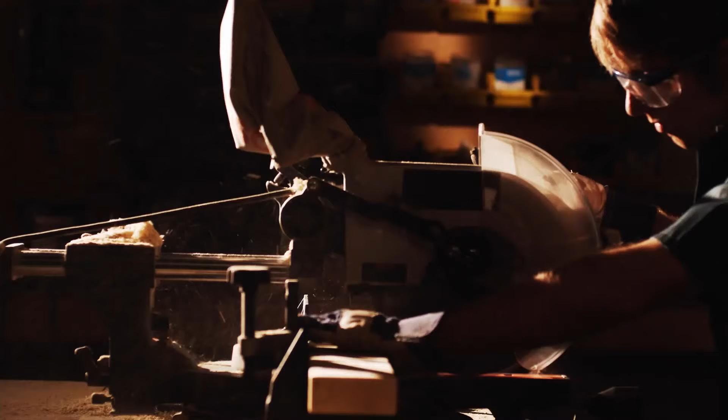I got into a VOTEC class in Moncks Corner, South Carolina, and the instructor saw some ability in me, so he took me to some competitions, which we won, district and state, and I really enjoyed the field, so I pretty much stayed with it throughout my life.

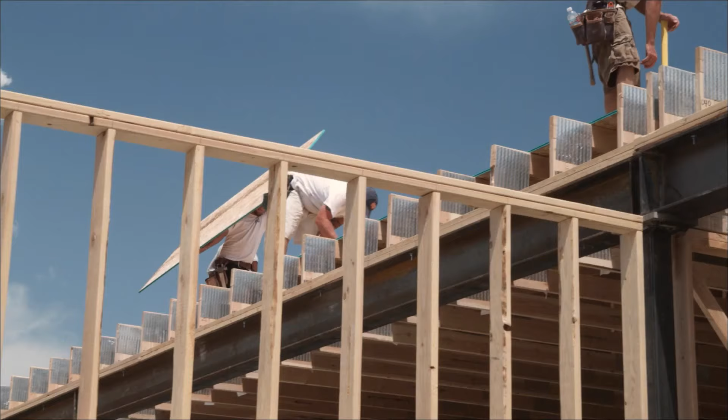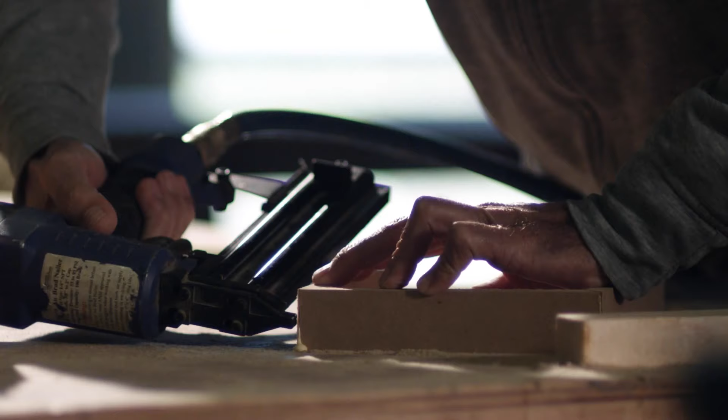So I went to work for Gaithersburg Cabinetry. I've been there for over 20 years. When I started with Gaithersburg, it was fairly small, a handful of employees, 10, 12 maybe. So everyone would measure, build, finish, sand, deliver, and install. As the company got bigger, we all got isolated and got specific fields.

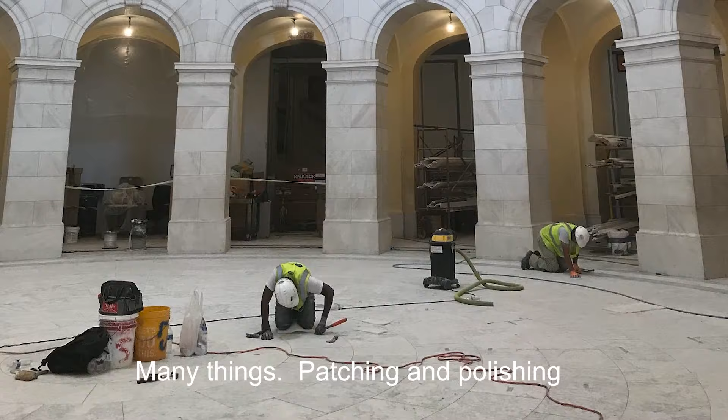I think the most fulfilling part of my job is to take someone's idea and turn it into something that's real, something that they're proud of because it was their idea to begin with. So basically turning their idea into a product that they can use or show or be proud of.

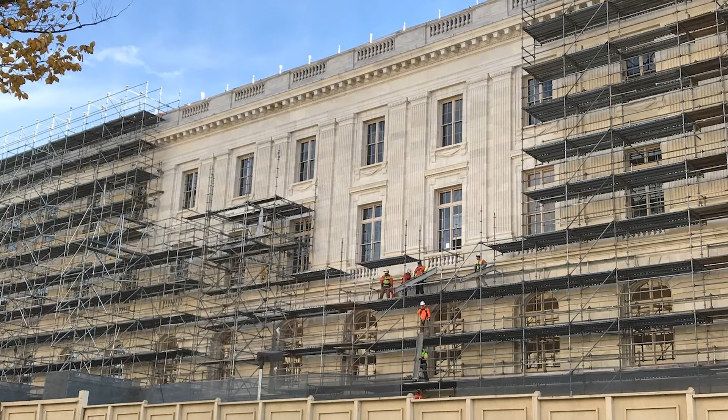My favorite is the Martin Luther King Memorial, White House, Capitol, Pentagon, Washington Monument. Many jobs, it's a lot of work.

One of my most fascinating jobs was the Jefferson Hotel because it had such a short deadline and it was very intricate. To put out that quality of work in a short time and be successful was a challenge and fun. The Jefferson Hotel actually won a Star Award, which made it even more worthwhile, being recognized by the Washington Building Congress. That's probably one of the other reasons it was so intriguing and fun for me.

My name is Carolina Lopez, and my dad's being inducted this year, Jose Lopez. He's very dedicated to his work. Even on the weekends he'll still be getting ready. Sunday he'll start getting ready for work early for Monday.

He really enjoys it, and he's always talking about it with his friends, with his family. We all know all the projects that he's going through. A couple weekends ago they finished the World War II Memorial, and he took me, we went walking, and he showed me all the things that we're doing and the stuff that he needs to go back to finish.

Whenever I have someone in training or who's working with me that's younger or just learning the trade, I always try and tell them how rewarding this line of work is and what you can get out of it. You get out of it like anything that you put into it.

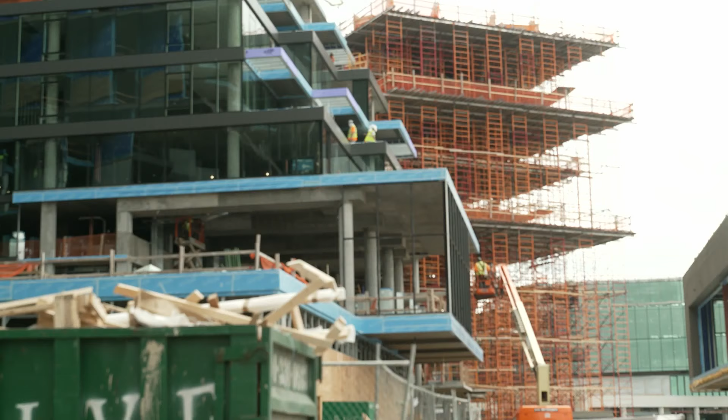My name is Jason Ryan. I'm a project executive with Baker DC here on the Wharf project. This is obviously a big job in town, unique job in town, high profile. If you're not that familiar with it, we're bound by the Washington Channel, and we're also bound by the Green Line. Some of the unique work was working with the requirements of WMATA and the support of excavation to keep the tunnels from falling into the site.

So there was some very significant support of excavation and vibration requirements for the metro tunnel itself, to the point where we had to pour the foundation walls that would hold the metro tunnel back after the basement was complete. So we had to go back underneath and pour those walls afterwards, just because of the requirements, the support of excavation, and all the sophistication that went into that. So that's something unique you don't see every day.

As well as the sequence of how we poured the mats and everything like that. Because of the tunnels there, they didn't want the tunnels floating. So there was a certain amount that they could excavate, and then we would have to pour with the vibration isolation on top of that. So there was lots of sequences with multiple trades there to get us to the point where we had to get it completed.

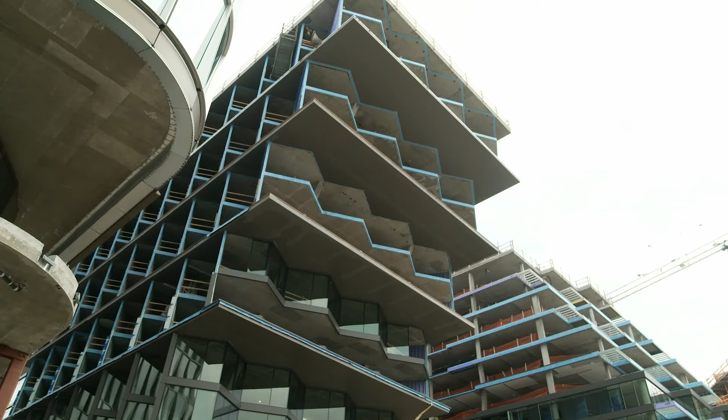This building here, this is what they call Parcel 8, and it's got 2 wings. The southern wing steps back while the northern wing is cantilevered out. So the whole thing is opposite. One steps in, one steps back.

The river over here, we got the metro over here. The slabs in the middle is what kept those from doing this. So we had to get those slabs in to allow them to pull all the steel, the rakers, and everything else. So these are some of the pieces, as you can kind of see with the pallets that are left over.

So all the testing they did for vibration, they used that to determine what density needed to go under that footing or that mat. If you're looking at the mat, it looked like a tie-dye shirt. You had the green, and all of a sudden it turned into red, and then it had a couple small areas of purple, because that was the highest density of vibration there. So it just turned into layout.

As well as installing, so to make sure it was in the right spots. And we had to interpolate where that occurred so that we put them in the right place, because if you put something that's not dense enough where you're getting a lot of loads, you're going to get building deflection. So it was very critical that we got the right density of material in the right places.

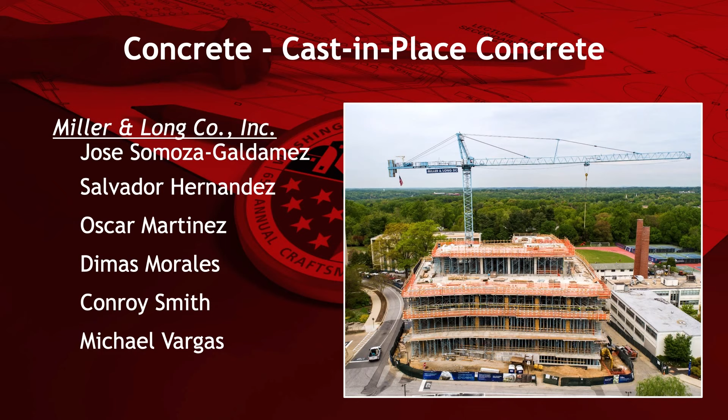In the category of concrete, cast-in-place concrete: Jose Somoza-Galdamez, Salvador Hernandez, Oscar Martinez, Dimas Morales, Conroy Smith, Michael Vargas, with Miller & Long Co., Inc. Project American University Hall of Science.

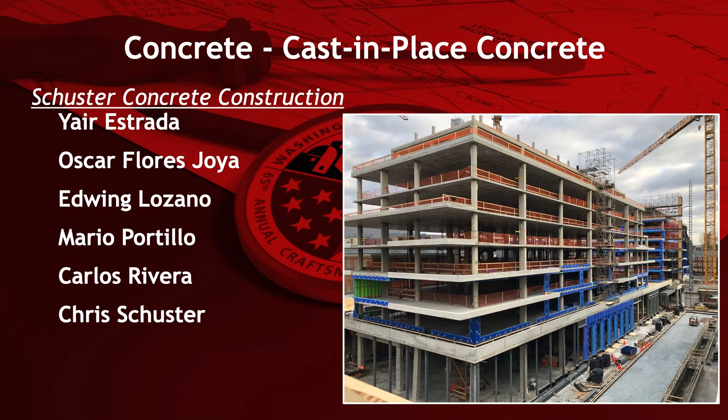In the category of concrete, cast-in-place concrete: Yair Estrada, Oscar Flores Joya, Edwing Lozano, Mario Portillo, Carlos Rivera, Chris Schuster, with Schuster Concrete Construction. Project City Ridge.

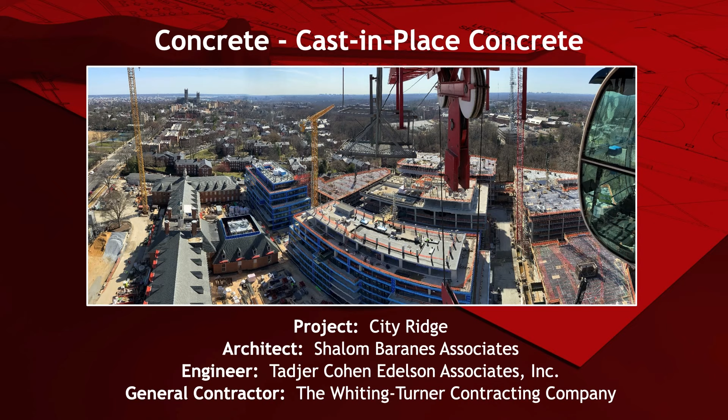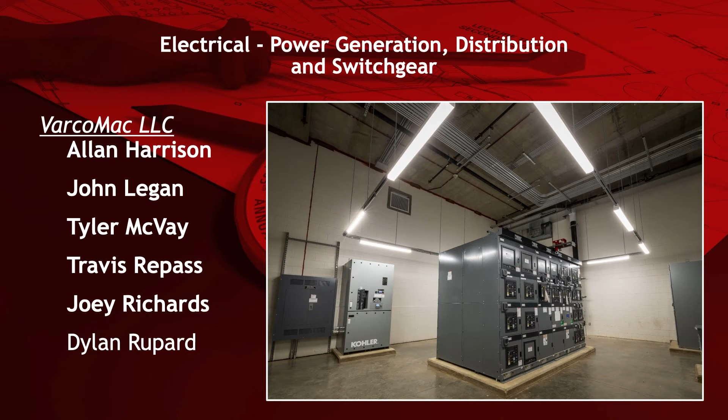In the category of Electrical, Power Generation, Distribution, and Switchgear: Allan Harrison, John Legan, Tyler McVay, Travis Repass, Joey Richards, Dylan Rupard, with VarcoMac LLC. Project MedStar Southern Maryland Hospital Center ED Expansion Phase 2.

In the category of Electrical, Power Generation, Distribution, and Switchgear: Dylan Calloway, Matt Eade, Temple Hypes, Dave Kaplan, with VarcoMac LLC. Project IFMC OR Renovations.

In the category of Electrical, Power Generation, Distribution, and Switchgear: Christina Dandy, Chris Grimes, Mike Gunzelman, Greg Naurot, Al Swan, with Synergy Electric Company, Inc. Project Architect of the Capitol, Rayburn Building Emergency Power.

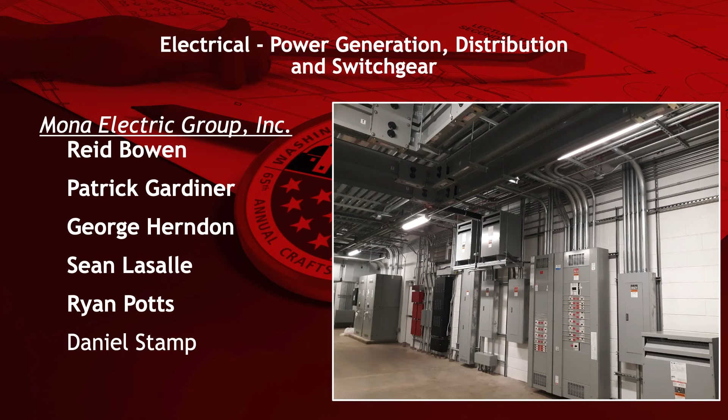In the category of Electrical, Power Generation, Distribution, and Switchgear: Reid Bowen, Patrick Gardiner, George Herndon, Sean Lasalle, Ryan Potts, Daniel Stamp, with Mona Electric Group, Inc. Project Capital One Block C Podium.

In the category of Electrical, Power Generation, Distribution, and Switchgear: Channing Crawford, Robert Crawford IV, Stephen Cross, Gary Downing, Danny Fallon, Tim Pierce Jr., with Power Solutions LLC. Project QTS Project Acadia PH2A.

In the category of Electrical, Power Generation, Distribution, and Switchgear: Mitch Andrews, Robert Hazychak, John E. Jenkins III, Paul Page, Jeremy Rodkey, Robert Walker, with Power Solutions LLC. Project Raging Wire NTT VA5.

In the category of Electrical, Power Generation, Distribution, and Switchgear: Matt Grady, Jason Mervin, Jeff Pollack, Jakin Skewkus, Thomas St. John, Solomon Thomas, with Mona Electric Group, Inc. Project: NIST Building 245 Modernization.

In the category of Electrical, Power Generation, Distribution, and Switchgear: Randy Beasley, Tim Dulaney, James Lawrence, Adrian Smith, Charlie Sutton, with Singleton Electric Company, Inc. Project: Government Publishing Office, New Electrical Substation.

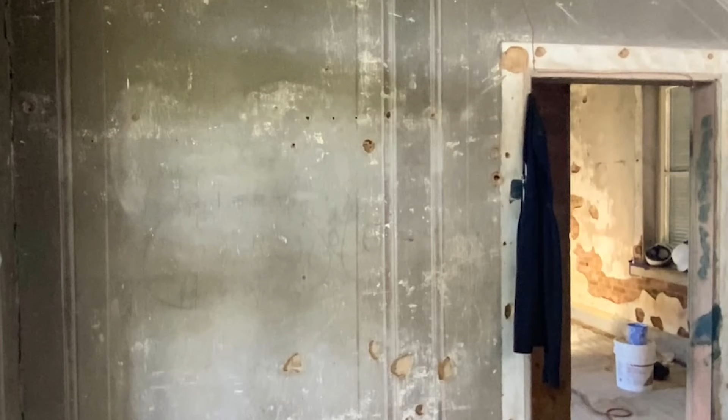The Monocacy battle really changed the outcome of the Civil War, which is why there's such historic prevalence. It is really held near and dear to the National Park Service. These buildings have been left open to the environment, no air conditioning, no heat, and have had a lot of water damage over the years. They were losing lath, they were losing plaster, they were losing everything.

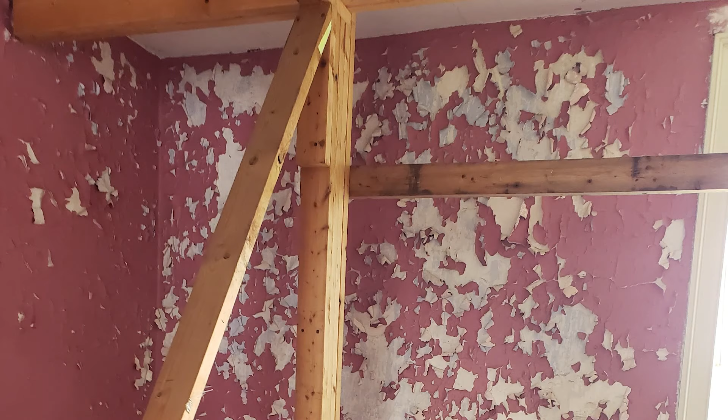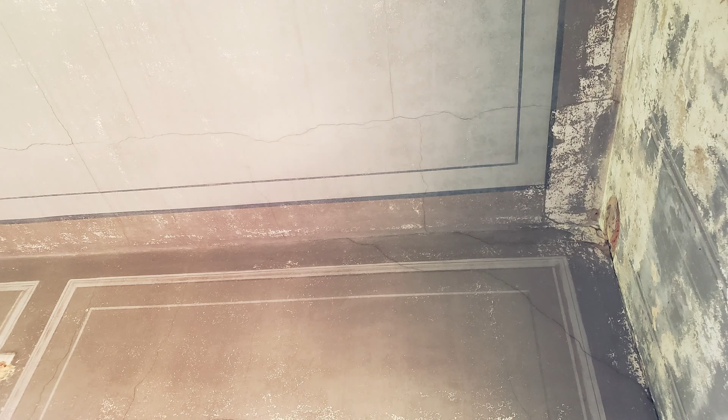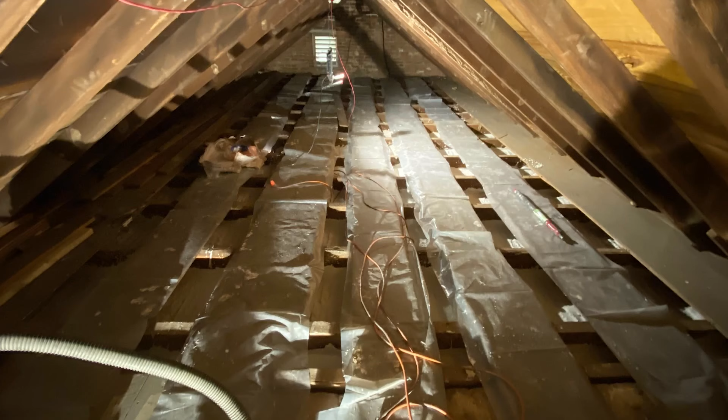This was strictly a stabilization of the plaster, not really a restoration project. They wanted to start saving the plaster because, in most cases, it was literally delaminated from the wood lath about 90%. When you're told to preserve this plaster, save every square inch that you can, there's no room for error. So my project approach was to build structures to push the plaster back up against the wood lath, go up in the attic, remove the floorboards, save the square nails, and label and number every plank. Each one of these structures was custom in each room.

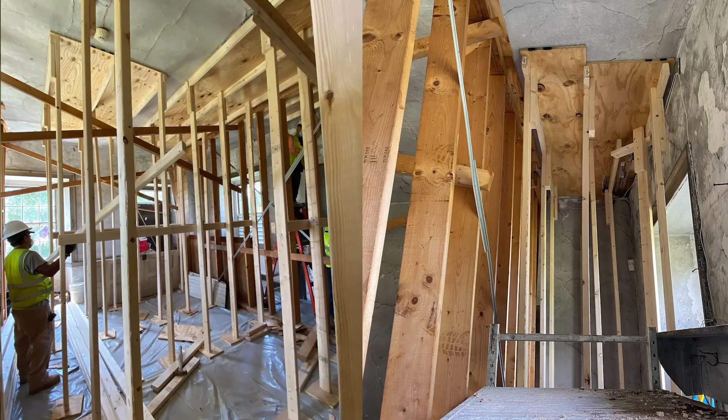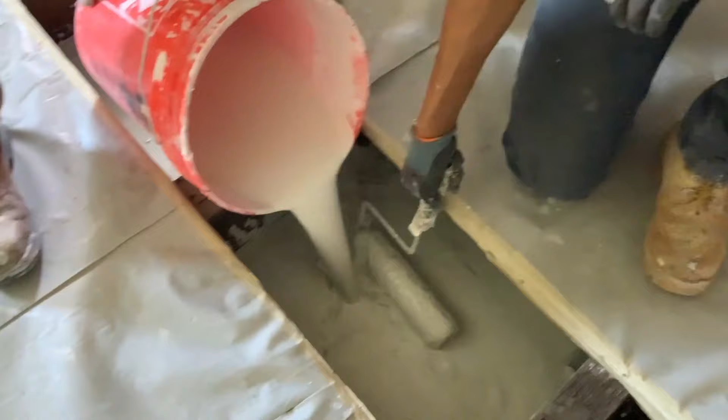You can see the extent of how much plaster we had to pour. But what this process did was completely reattach the ceiling plaster, encapsulate the wood lath, and rekey it back up. These ceilings are so tight now, they'll never fall again.

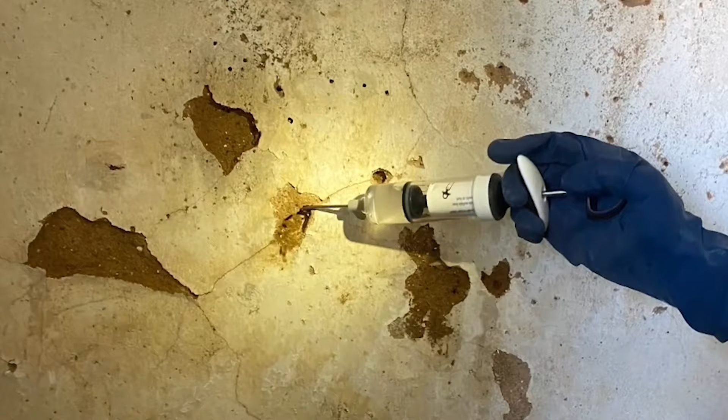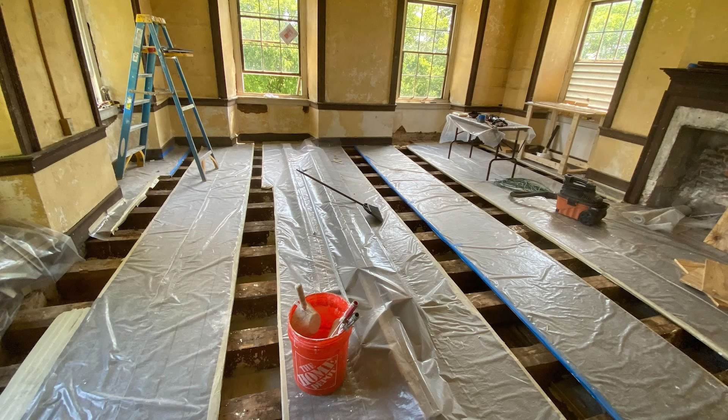Every single crack and crevice in all three of these buildings received multiple injections of consolidant. I can't even begin to tell you how many injections we did, thousands and thousands. In some areas where the wood lath was no longer reaching from one side to the other, we provided blocking in there. Again, not because this is what we had to do.

This was our suggestion to save as much of the historic fabric of these buildings as possible. Part of our defined scope of work was that if there were pieces of plaster laying on the floor, we needed to identify them, put them back together, and put them back where they went. There was a wood grain in the plaster, and we would lay these out on tables and match up the wood grain. So it was kind of a big puzzle. Then I glued them all back together with plaster weld in bigger chunks, and we started reattaching them.

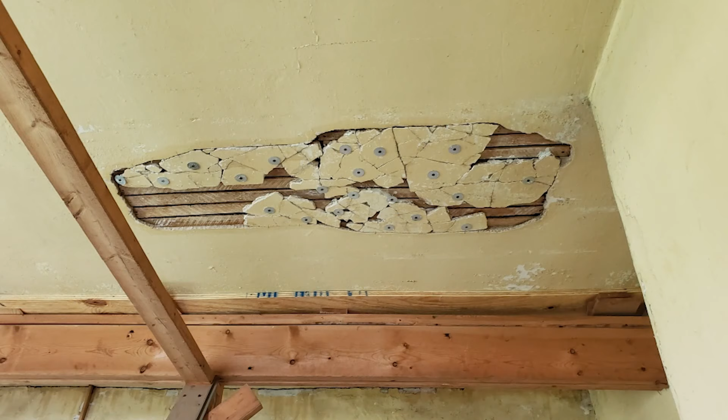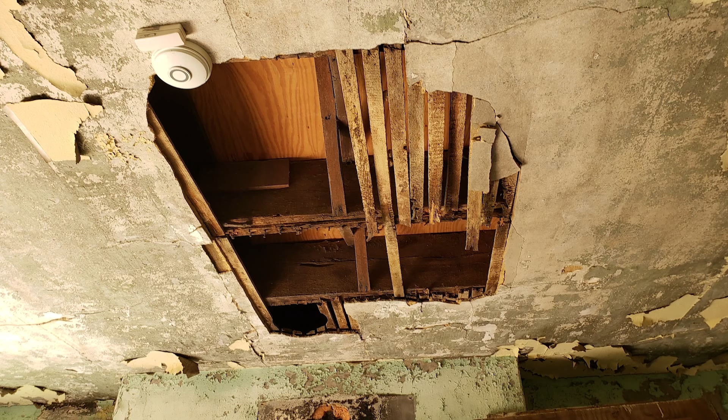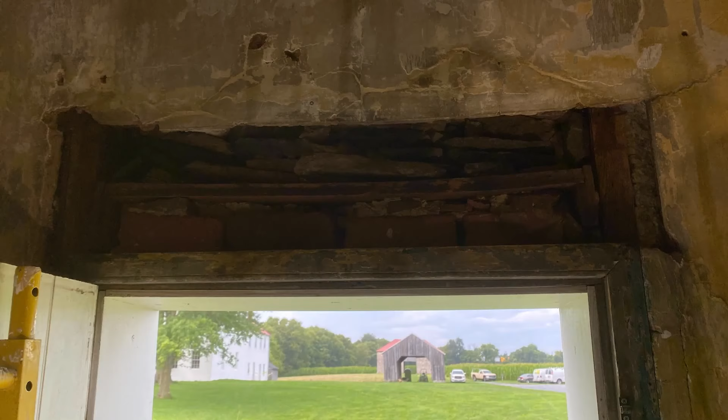Back to the ceiling, all of our plaster mixes were matched to what the existing plaster was - we used the same material, the same type of sand, the same type of plaster mix, the same type of lime added. We mixed everything right there in the field. So this wasn't just a plaster job. This was a true labor of love for us to go in and do what we did. But yeah, it was just an enormous amount of work and craftsmanship to be able to preserve as much of the plaster as we could that was originally there.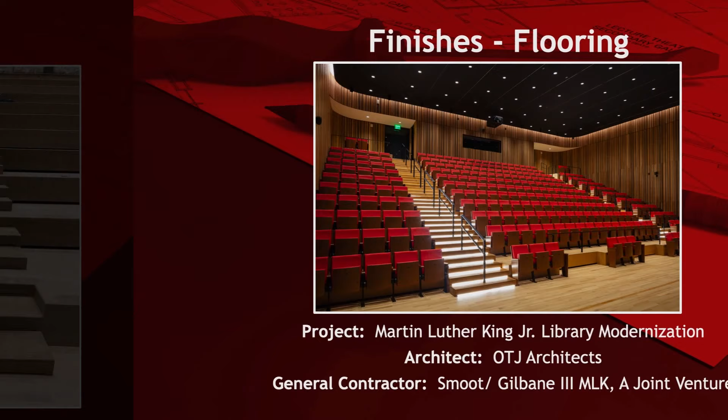In the category of Finishes, Flooring: Patrick Joy, Vassal Kikalo, Russell Sterner, with Mastercare Flooring. Project Martin Luther King Jr. Library Modernization.

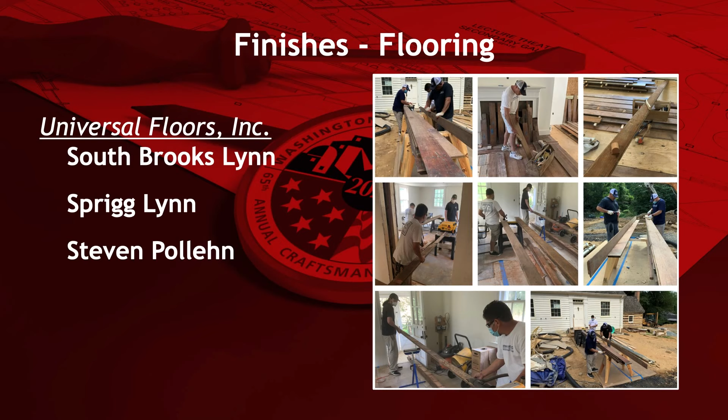In the category of Finishes, Flooring: South Brooks Lynn, Sprigg Lynn, Steven Pollehn, with Universal Floors, Inc. Project Josiah Henson Museum Historic Restoration.

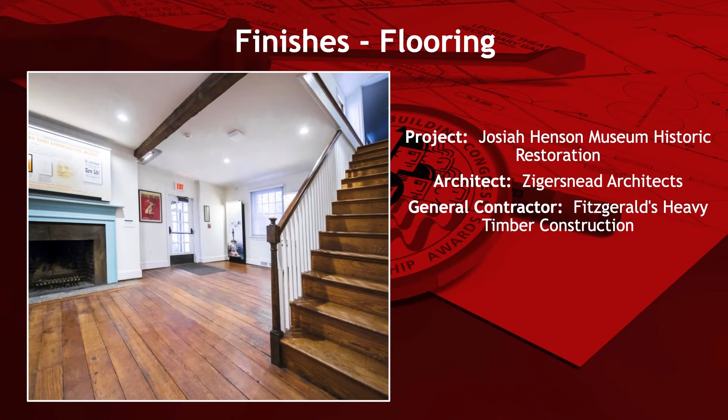In the category of Finishes, Painting and Wall Covering: Graham Armstrong, Felix Cespedes, Matt Lawler, with Sparkle Painting Company. Project Crossing.

In the category of Finishes, Plaster: Nelson Rodrigo Berrios, Cirilo Tapia Fuentes, Maximiliano Soto Ledesma, Pablo Condori Perlas, Melitón Soto Quirós, Elmer Ferrufino Zurita, with ATS Studios, LLC. Project Martin Luther King Jr. Library Modernization.

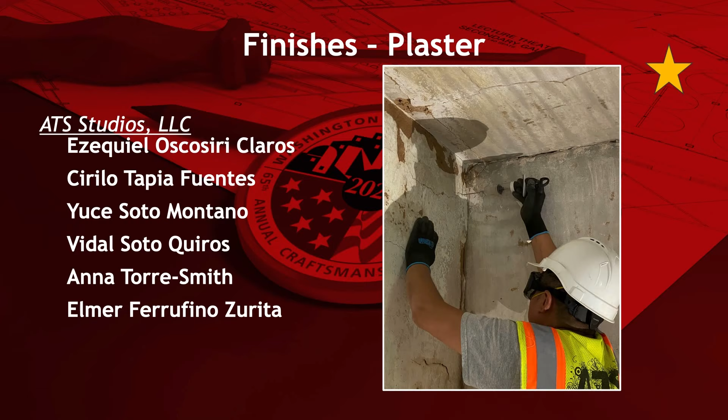In the category of Finishes, Plaster: Ezequiel Oscosiri Claros, Cirilo Tapia Fuentes, Yuce Soto Montano, Vidal Soto Quiros, Anna Torre-Smith, Elmer Ferrufino Zurita, with ATS Studios, LLC. Project National Park Service Stabilization and Restoration of Monocacy Battlefield Historic Plaster.

In the category of Finishes, Plaster: Julian Davis, Jose Gomez, Ian Jenkins, Wills Mayo, Marlon Salmeron, Ricardo Santos, with Hayles & Howe, Inc. Project Elliott Hine Middle School Renovation.

In the category of Masonry, Exterior Stone: Gilmer Alman, Maber Hernandez, William Orellana, Alfredo Ornelas, Tommy Palovich, with R. Bratti Associates. Project Capital One Block C Performing Arts Center.

In the category of Masonry, Exterior Stone: Jose Ramon Casal Campos, Antonio Chirino, Ernesto Machado, Mauro Narciso, Leonardo Bravo Reyes, Freddy Rios, with Lorton Stone LLC. Project National Native American Veterans Memorial.

In the category of Masonry, Exterior Stone: Cándido Abundes, William Ángel Arevalo, Manuel Omar Hernández, Mauro Narciso, Iván López Cieiro, Antonio Jorge Díaz Silva, with Lorton Stone LLC. Project Arlington Memorial Bridge Disassembly, Protection, Preservation, and Restoration.

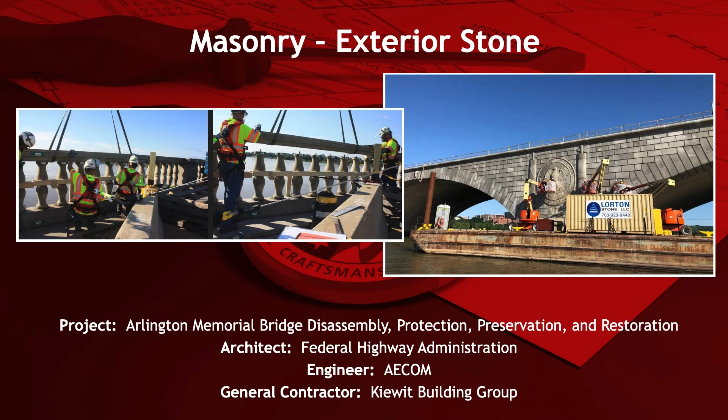In the category of Masonry, Exterior Stone: Sterling Gaston, Eric Holdway, Carlos Mariño, Juan Romero, Agustín Baca, Hugo Baca, with Lorton Stone LLC. Project Corpus Christi Catholic Church.

In the category of Masonry, Interior Stone and Marble: Reynaldo Andrade, Ludwig Portillo, Crispin Urquizu, Denise Bilka, with R. Bratti Associates. Project The Wilson and the Elm.

In the category of Masonry, Interior Stone and Marble: Eric Blanco, Carlos Blanco Romero, David Kirby, Francisco J. Mijango, Ronald Wondolowski, with Boatman and Magnani. Project: Paul Hastings, D.C.

Also in the category of Masonry, Interior Stone and Marble: Carlos Blanco Romero, David Fitchett, David Kirby, Ronald Wondolowski, with Boatman and Magnani. Project: 250 M Street, DDOT Headquarters. And: Jose Garay, Victor Hernandez, Felipe Madureira, Ruben Moya, Zenon Moya, Wilver Zavala, with Rugo Stone LLC. Project: Metropolitan Square Atrium Renovation.

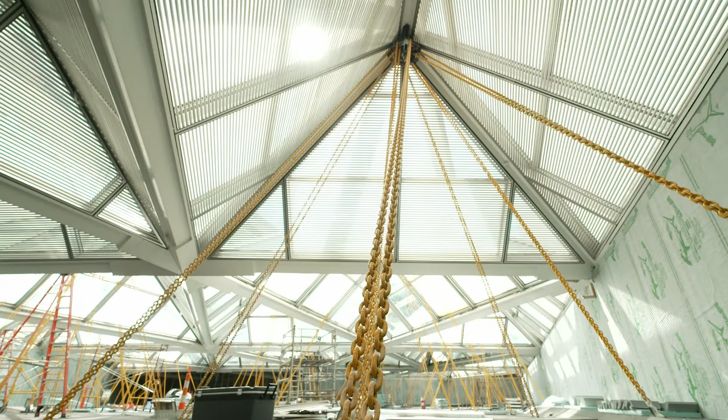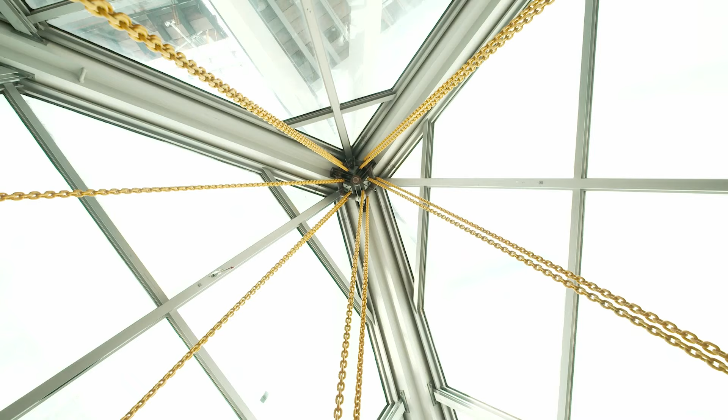For context, we're standing in the main atrium of the East Building of the National Gallery of Art. Our project includes the replacement of the 16,000 square foot skylight right above us. The skylight consists of 25 tetrahedrons, all laid out in one single isosceles triangle, and that triangle geometry is mimicked throughout the East Building as a design theme.

The replacement of the skylight was to be done in such a way that would allow the gallery to remain fully operational while adhering to strict security measures, environmental control measures, noise and vibration limits, temporary waterproofing measures, and above all making sure the irreplaceable works of art in the atrium remain protected. So BrandSafway designed a scaffold and rigging system to meet all of these requirements.

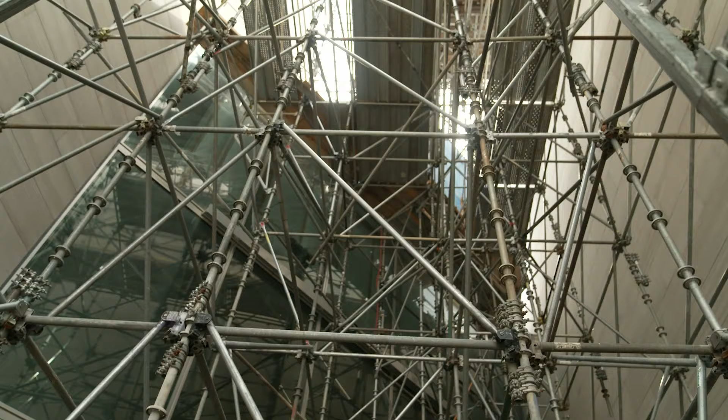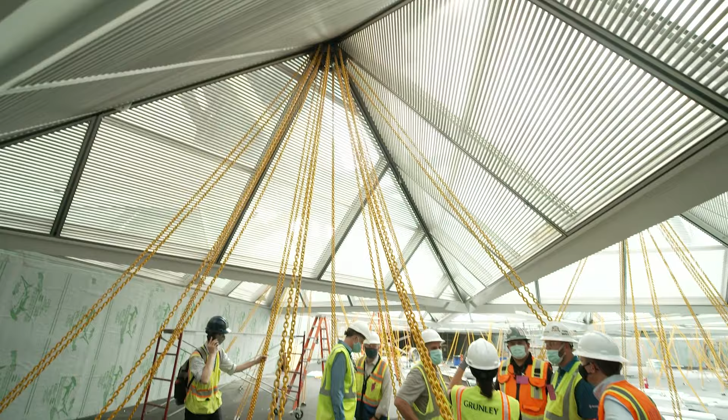A temporary scaffold tower was built, and BrandSafway transported material to the top of the scaffold, starting to build out the initial 250 square foot platform section from the top. They also custom fabricated 25 brackets mounted to the apex of every single tetrahedron, and these brackets hold the chains that support the platform.

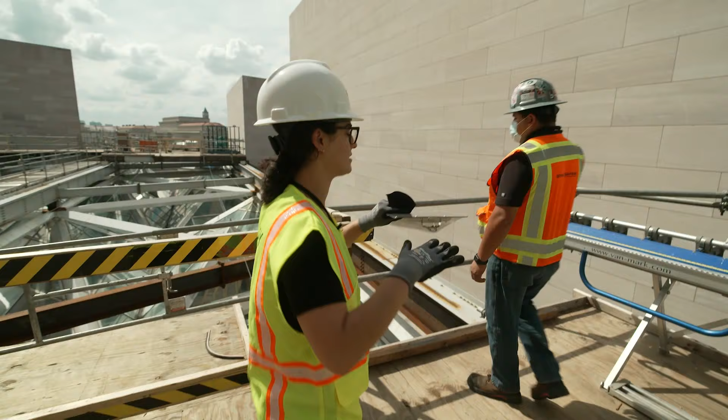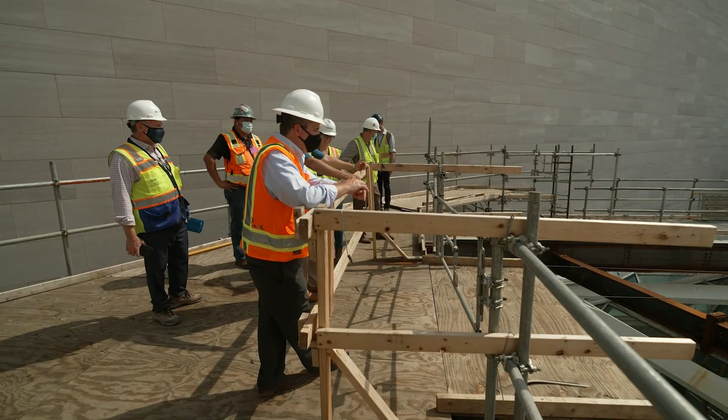The replacement of the skylight includes every component of the system with the exception of the steel framing. So this system we're standing on top of is the last piece of the puzzle of BrandSafway's scaffolding and rigging system. It came with first protecting the sculptures, then building the suspended platform, and lastly assembling the gantry system above.

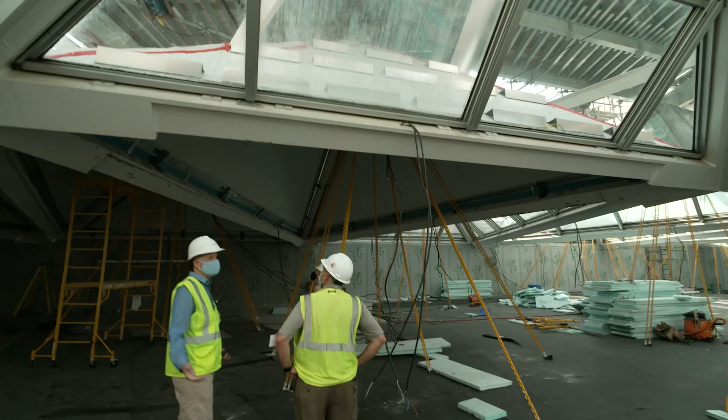Very, very cool. It truly is. I feel so lucky, and it's been a huge challenge for me. It's been a huge learning curve, and I would not have it any other way. It's awesome.

This is the Corpus Christi Catholic Church project out in Aldie, Virginia. It seats about 1,200 people, and today we're going to be looking at the roof specifically. Something significant about the roof is there's a lot of area—it's an 18:12 slope, so it was a really physically daunting task.

It was done by rough roofers who had a large crew every day. They had pick boards, a lot of lifts, boom lifts, and mountain climbing gear that they used every day. They took special care to put their tie-off points along the ridge so that any lines wouldn't overextend, keeping everybody safe during this project.

The most significant part, my favorite part of the church, is the steeple. It's called a flèche, the French word for steeple. There are really four tiers to it, and everything is made out of 20-ounce Freedom Gray.

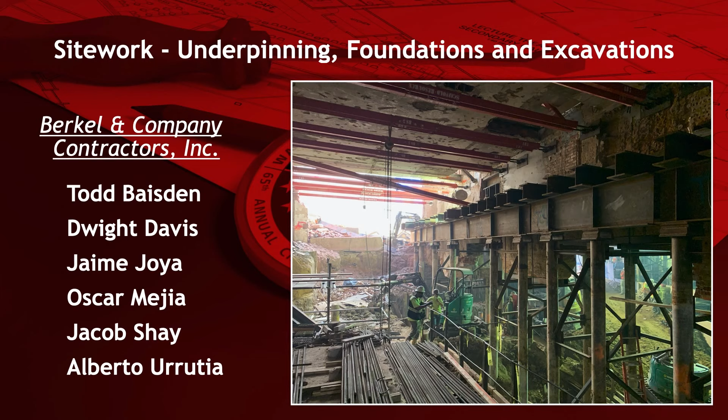In the category of Sitework, Underpinning, Foundations, and Excavations: Todd Baisden, Dwight Davis, Jaime Joya, Oscar Mejia, Jacob Shay, Alberto Urrutia, with Berkel & Company Contractors, Inc. Project, Milken Institute Center for Advancing the American Dream, Phase 2.

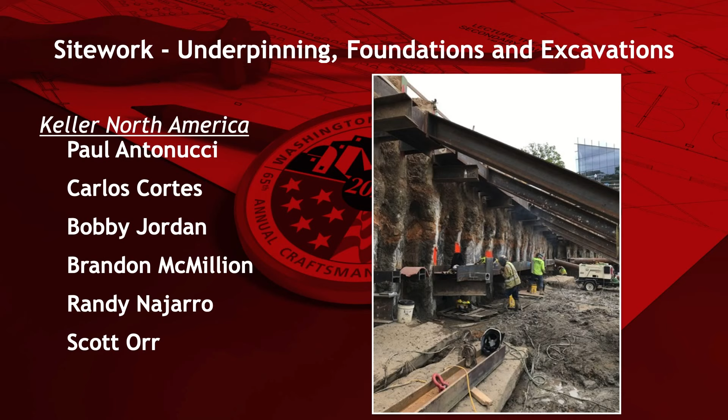In the category of Sitework, Underpinning, Foundations, and Excavations: Paul Antonucci, Carlos Cortes, Bobby Jordan, Brandon McMillion, Randy Najarro, Scott Orr, with Keller North America. Project, The Wharf, Phase 2, Horizontal.

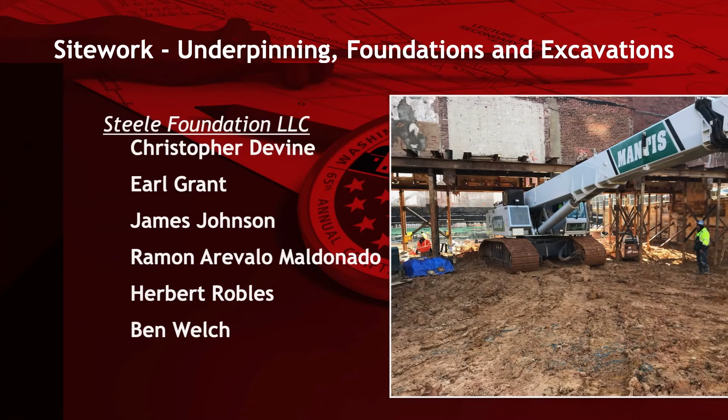In the category of Sitework, Underpinning, Foundations, and Excavations: Christopher Devine, Earl Grant, James Johnson, Ramon Arevalo Maldonado, Herbert Robles, Ben Welch, with Steele Foundation, LLC. Project, Collection 14.

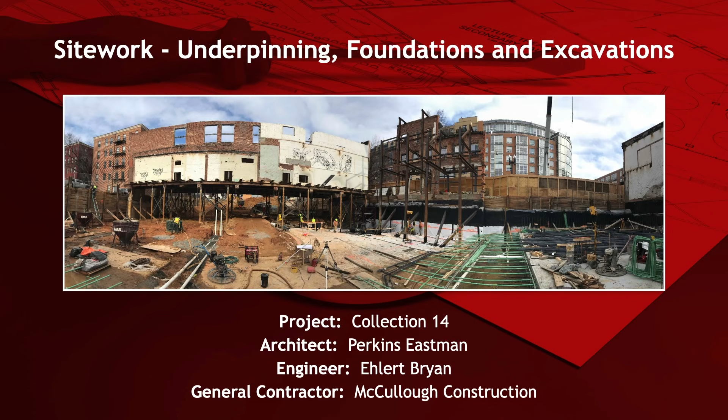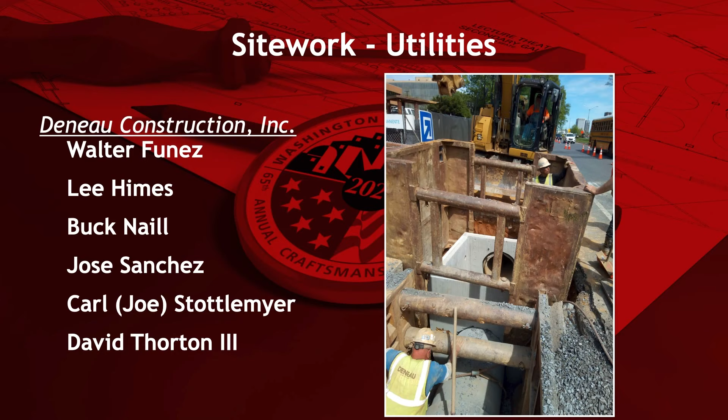In the category of Sitework, Utilities: Walter Funez, Lee Himes, Buck Naill, Jose Sanchez, Carl Joe Stottlemyer, David Thorton III, with Deneau Construction, Inc. Project, KP Rockville Regional Lab.

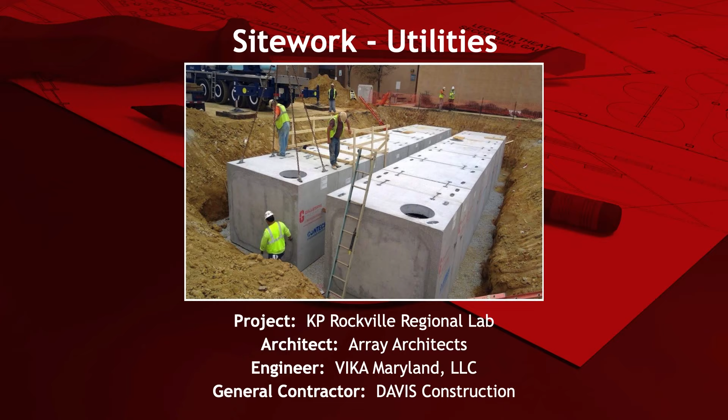Let's take a moment to view the final video segment showcasing this year's Star Award nominees in the categories of Finishes, Drywall, Morgan State University's new Student Services Center, and Special Construction, Steel, Structural Steel, Reston Gateway.

Marshall was contracted to furnish and install structural and non-structural metal stud framing, acoustical and thermal insulation, gypsum wallboard, fire stopping, acoustical and specialty ceilings, as well as rough carpentry.

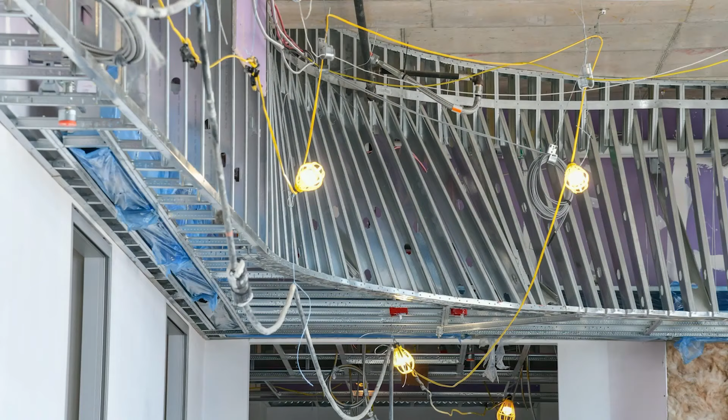This architectural masterpiece is the latest addition to Morgan State University's 152-year-old campus. Tyler Hall consists of a 5-story, 139,000 square foot structure. The structure also incorporates architectural elements like stone, metal panels, and glazing to maximize natural light and achieve a visually stunning appearance. This project was designed and achieved LEED Silver certification.

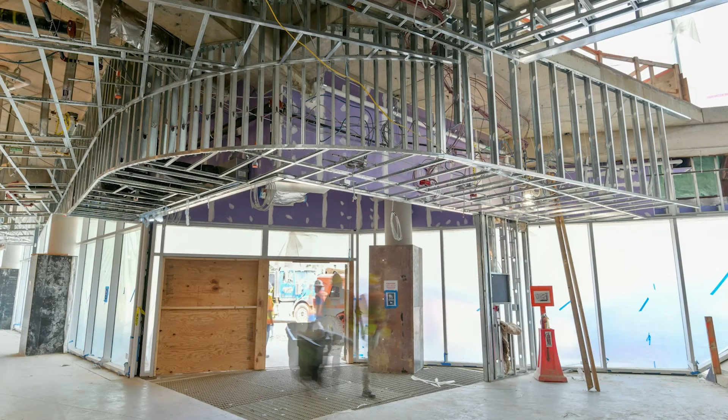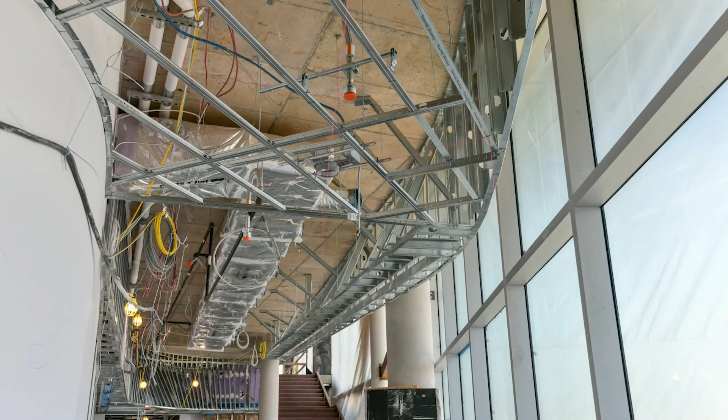Our portion of the project took just under 2 years to complete. Going into this project, we knew it would be difficult, but we truly didn't comprehend the complexity of its design intent based off the two-dimensional drawings we were provided, and how this would all play out with an aggressive schedule. We had to assemble the best team possible to tackle the challenges this project was going to present.

Our first challenge was layout, so we had to request a carte blanche approach to design of our framing. We utilized mathematical equations when possible, our total station robotic layout tool, a ton of man hours, and our talented team coordinating our framing members to ensure we achieved the obscure angles, complex radiuses, and ever-changing pitches that the architect was attempting to represent on the drawings.

Our next challenges were gypsum wallboard and finishing installations.

With the help of some of the best hangers, finishers, and finish carpenters in the industry, we were able to provide what most would have thought was nearly impossible. The amount of time, precision, and commitment that went into the execution of this work embodies everything you could expect from a true master craftsperson.

Commercial Interiors and the entire project team are so proud of the way this project turned out, and we hope that everyone who has the opportunity to visit this building enjoys what they see.

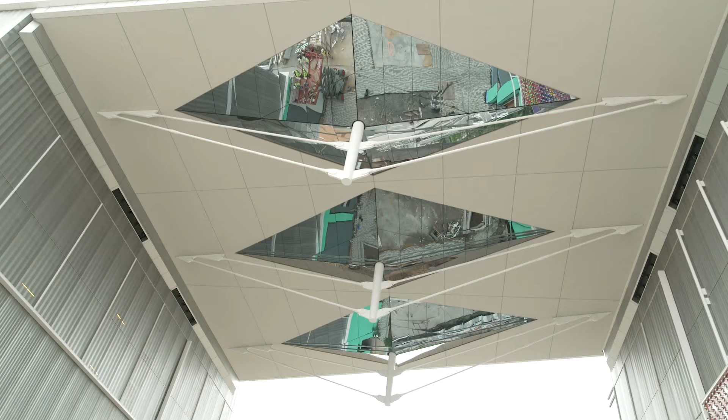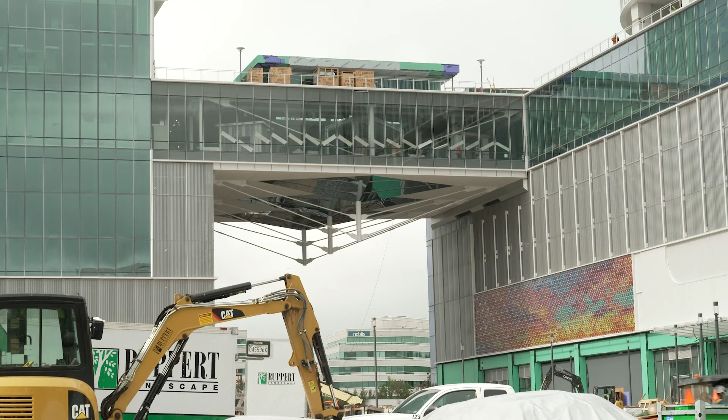Hi, my name's Mike Riesinger. I work with Clark Construction, the general contractor on the project. Big picture: Reston Gateway is the project. What we're seeing today is called the connector floor, a floor about 77 feet above grade that connects both towers. It's a structural steel superstructure with some unique design elements. That's kind of the big picture of what we're looking at today.

We're about 108, 110 feet of structural steel, about 106 feet bearing to bearing on the structure up there. What makes this structure unique compared to other connector bridges you'll see is that the engineer went with a king post support underneath. Most bridges have support over the top, either a truss configuration or cable supports. In this project, they flipped it over, so that long, tall post going down is in effect holding up the spine.

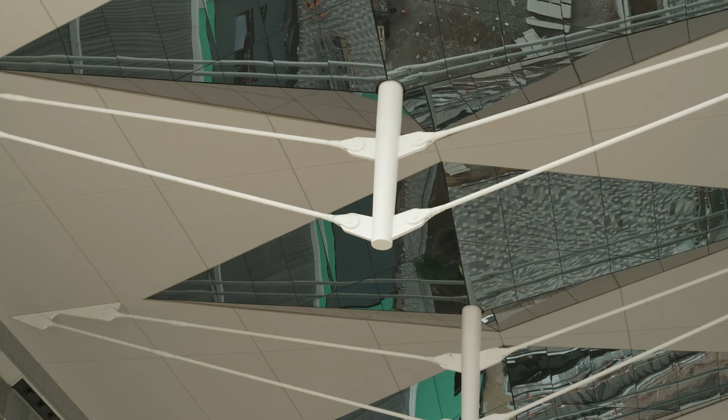There's 4 feet of planters on the roof of the structure, plus all the tile and finished concrete. So Clark and Berlin had to monitor the deflection as it went. The shoring supported each truss independently as they built it. If you drove by here when we were doing this, the whole thing was scaffolded so we could build the very custom soffit you're about to look at. So the shoring held the structure up.

At about the 6-week point, we started putting the load onto the rods. We had a tower crane out here that we used for all the erection. Each truss is designed with redundancy — if one rod were to fail, there would be deflection, but it wouldn't collapse. That's an interesting design perspective.

What's important too is that everything you see — all the tabs and beams hidden by the soffit — was planned and fabricated, and everything went together as planned from a fit and finish standpoint. We can stand here now knowing it's going to stay long after Mike and I are gone. At least when I'm retired — I don't know how much longer Mike's got at it.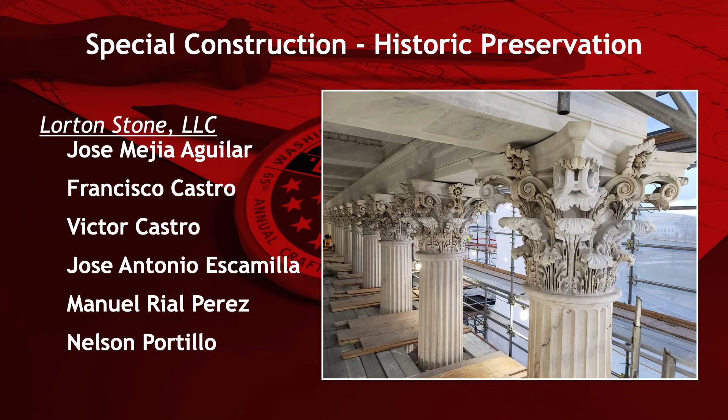In the category of Special Construction, Historic Preservation: Jose Mejia Aguilar, Francisco Castro, Victor Castro, Jose Antonio Escamilla, Manuel Rial Pérez, Nelson Portillo, with Lorton Stone LLC. Project: U.S. Capitol South.

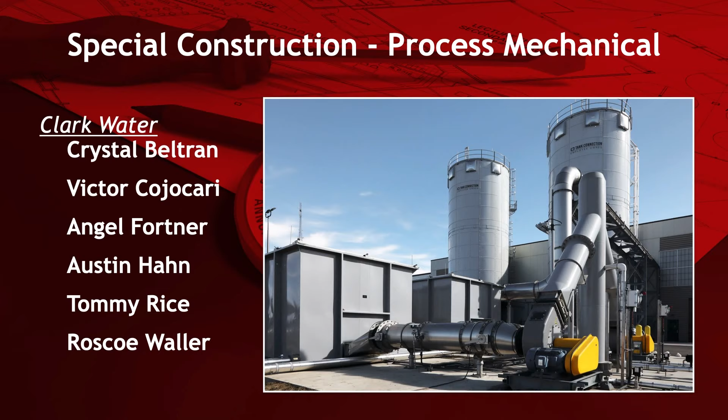In the category of Special Construction, Process Mechanical: Crystal Beltran, Victor Cojocari, Angel Fortner, Austin Hahn, Tommy Rice, Roscoe Waller, with Clark Water. Project: Little Patuxent Water Reclamation Plant Biosolids Upgrade, Edition Number 8.

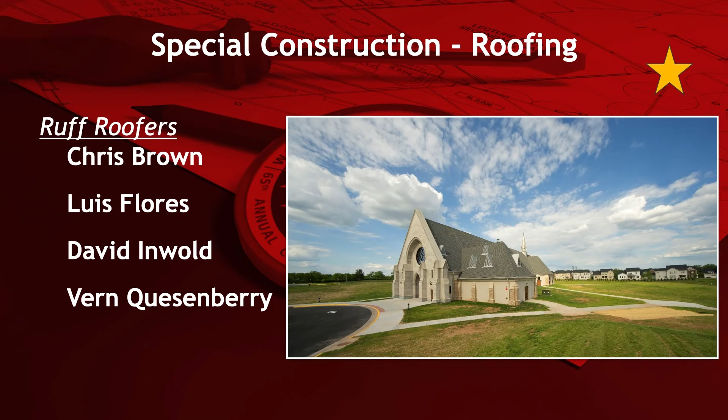In the category of Special Construction, Roofing: Chris Brown, Luis Flores, David Inwold, Vern Quesenberry, with Ruff Roofers. Project: Corpus Christi Catholic Church.

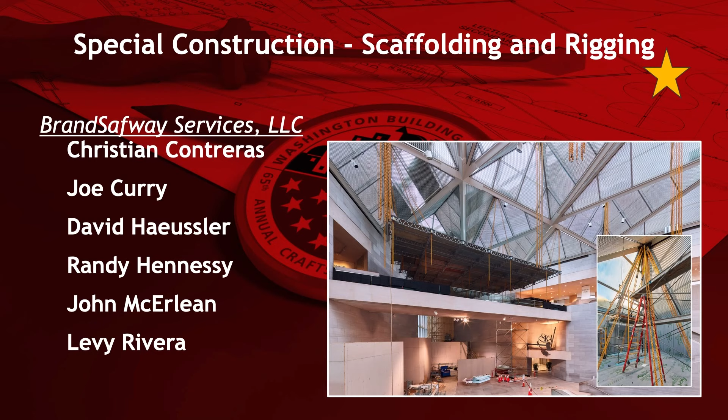In the category of Special Construction, Scaffolding and Rigging: Christian Contreras, Joe Curry, David Haeussler, Randy Hennessy, John McErlean, Levy Rivera, with BrandSafway Services, LLC. Project: National Gallery of Art, Work Area 9.3 Improvements.

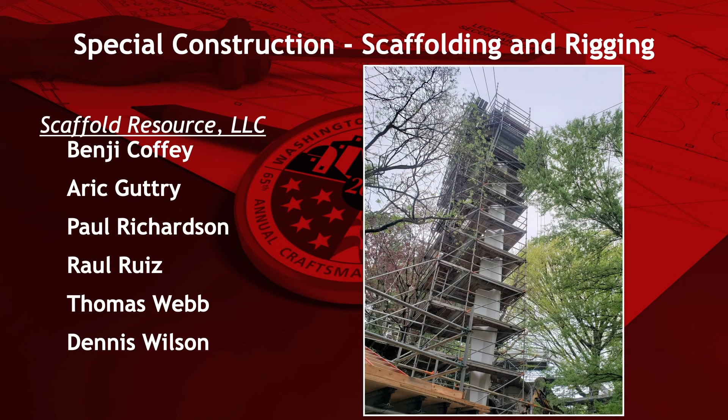In the category of Special Construction, Scaffolding and Rigging: Benji Coffey, Aric Guttry, Paul Richardson, Raul Ruiz, Thomas Webb, Dennis Wilson, with Scaffold Resource LLC. Project: Renewal of the Great Flight Bird Aviary at the National Zoo.

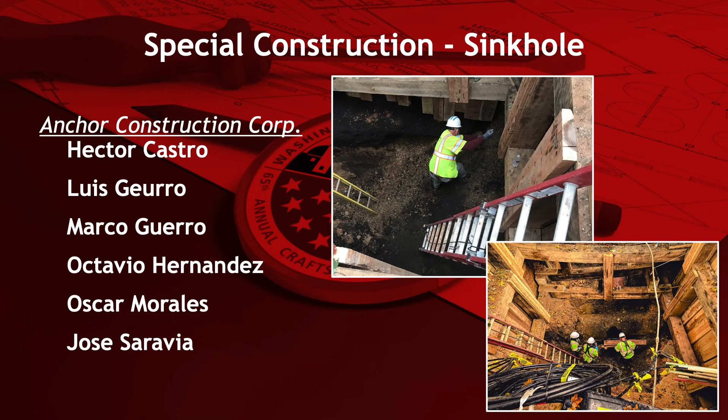In the category of Special Construction, Sinkhole: Hector Castro, Luis Geurro, Marco Guerro, Octavio Hernandez, Oscar Morales, Jose Saravia, with Anchor Construction Corp. Project: 1810 Irving Street Northwest DC Water Sinkhole.

In the category of Special Construction, Stone Carving: Nicholas Benson, Andrew Del Gallo, Sebastian Martorana, Paul Russo, with the John Stevens Shop. Project: Dwight D. Eisenhower Memorial.

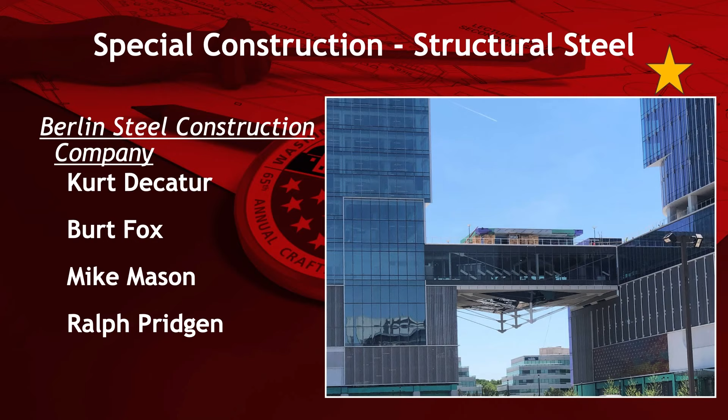In the category of Special Construction, Structural Steel: Kurt Decatur, Burt Fox, Mike Mason, Ralph Pridgen, with Berlin Steel Construction Company. Project: Reston Gateway. In the category of Special Construction, Thermal and Moisture Protection: Misael Argueta, Nilson Argueta, Roberto Bonilla...

John Mavilla, Saul Pereira, Amol Tatilla, with HRGM Corporation. Project: Martin Luther King Jr. Library Modernization. In the category of Special Construction, Thermal and Moisture Protection: Elmer Amaya...

Maria Arevalo, Fernando Duran, Kerin Duran, Valente Gonzalez, Julio Hernandez, with Prospect Waterproofing Company. Project: U.S. Chamber of Commerce Building Envelope Rehabilitation.

In the category of Special Construction, Thermal and Moisture Protection: Jaime Alvarez, Eddie Cruz, Juan del Cid, Osmin Palacios, William Sessoms, Juan Zuniga, with Prospect Waterproofing Company.

Project Riverfront Phase 2. In the category of Woods and Plastics, Architectural Millwork: Nelson Delgadillo, Carlos Gomez, Brian Morrow, Rocio Perez, Stephen Sperling, Hung Vo, with Gaithersburg Architectural Millwork. Project Harbor Chase of Fairfax.

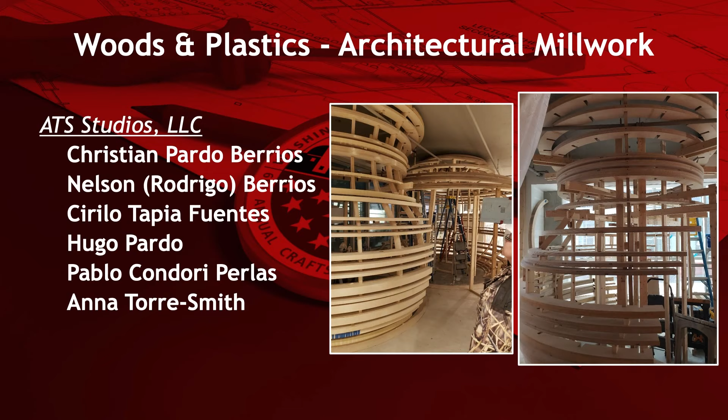Project Riverfront Phase 2. In the category of Woods and Plastics, Architectural Millwork: Christian Pardo Berrios, Nelson Rodrigo Berrios, Yuse Soto Montano, Hugo Pardo, Pablo Condori Perlas, Elmer Ferrufino Zurita, with ATS Studios LLC. Georgetown University modernization of Copley Crypt and St. William's Chapel.

In the category of Woods and Plastics, Architectural Millwork: Josue Chicas, Roberto Chicas, Mike Grimes, Nelson Perez, Roger Perez, Jamie Valencia, with ISEC Inc. Project JHU APL B201.

In the category of Woods and Plastics, Architectural Millwork: Carlos Escobar, Joan Manny Fretes, Billy Harp, Miguel Savillon, with ISEC Inc., and Robert Chandler, Randall Kurtz, with Premier Consultants International Inc. Project Martin Luther King Jr.

Library Modernization. In the category of Woods and Plastics, Architectural Millwork: Peter Baguki, Alan Cloud, Han Nguyen, Sai Nguyen, Singh Ratana, Gary Stone, with Jefferson Millwork and Design. Project North Bethesda Center.

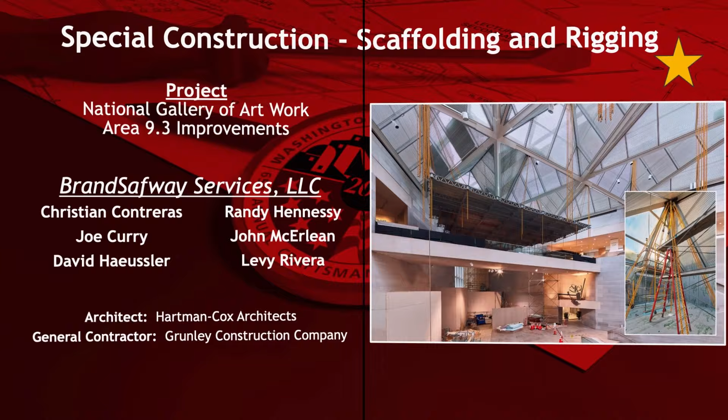For finishes, plaster: National Park Service stabilization and restoration of Monocacy Battlefield Historic Plaster. For special construction, scaffolding and rigging: National Gallery of Art Work Area 9.3 improvements. For masonry, exterior stone: National Native American Veterans Memorial. For special construction, structural steel: Reston Gateway.

The Star Award for Excellence in the Face of Adversity goes to the National Park Service, Stabilization and Restoration of Monocacy Battlefield, Historic Plaster. Congratulations to the winning craftsmen: Ezequiel Osquiri Claros, Cirilo Tapia Fuentes, Yuke Soto Montano, Vidal Soto Quiros, Anna Torre-Smith, Elmer Ferrufino Zarita, all with ATS Studios.

Congratulations. The Star Award for Technical Excellence goes to National Gallery of Art Work Area 9.3 Improvements, Scaffolding and Rigging. Congratulations to the winning craftsmen: Christian Contreras, Joe Curry, David Haeussler, Randy Hennessy, John McErlean, Levy Rivera with BrandSafway Services, LLC.

The Star Award for Visual Excellence goes to Dwight D. Eisenhower Memorial. Congratulations to the winning craftsmen: Nicholas Benson, Andrew Delgado, Sebastian Martorana, Paul Russo with the John Stevens Shop.